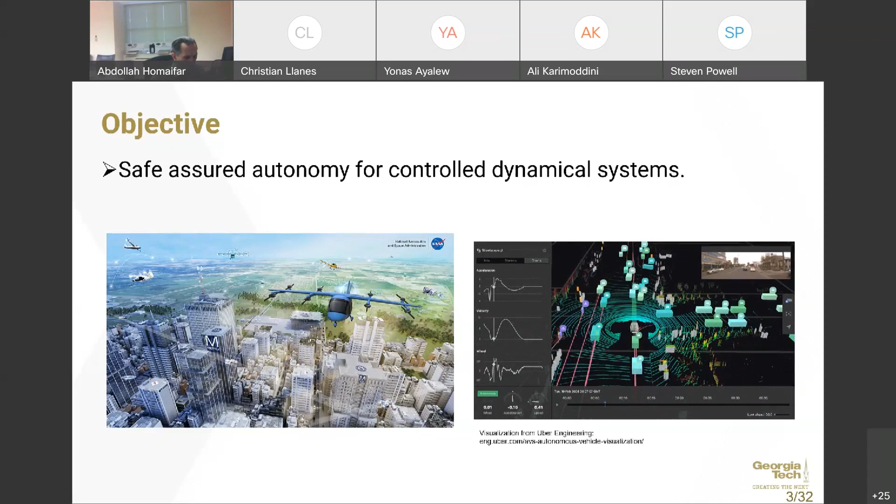In this slide, I'll give a brief review of the structure of a controlled dynamical system. We're only really looking at continuous systems with defined control inputs in this talk, where the state evolution is continuous in time, as opposed to discrete or hybrid systems with possible switching mechanisms.

If we look above at the system dynamics, we see some equations - an ordinary differential equation with another mapping equation from x, which is the state. These can represent position and velocity terms for a vehicle, and y represents the outputs. These can be sensor measurements, and they can also be corrupted from some noise sometimes - this is introduced in the formulation.

The system dynamics produces some outputs, which are measured from some sensor. Then you have some estimator, whether it be a particle filter or a Kalman filter. With this estimation, if there's noise introduced into the sensor, then the estimated state is not exact, but in a perfect world, you can inherently map from the output y to x using the inverse of h.

So if it is noisy, then you get some x hat, which is the estimate of the state, and you feed that to a primary controller. This is what's going to be controlling your vehicle to do some kind of objective. This primary controller can use model predictive control, PID, linear quadratic regulation, or a neural network.

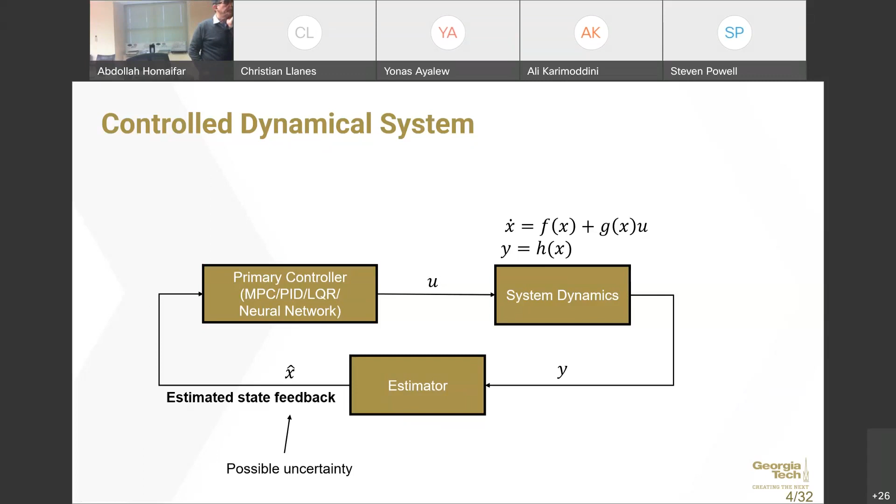This will give some desired control action that meets the objective, and that is fed to your system dynamics, which is the vehicle - braking on a car, or gas on a car, or thrust on a quadrotor, et cetera, et cetera.

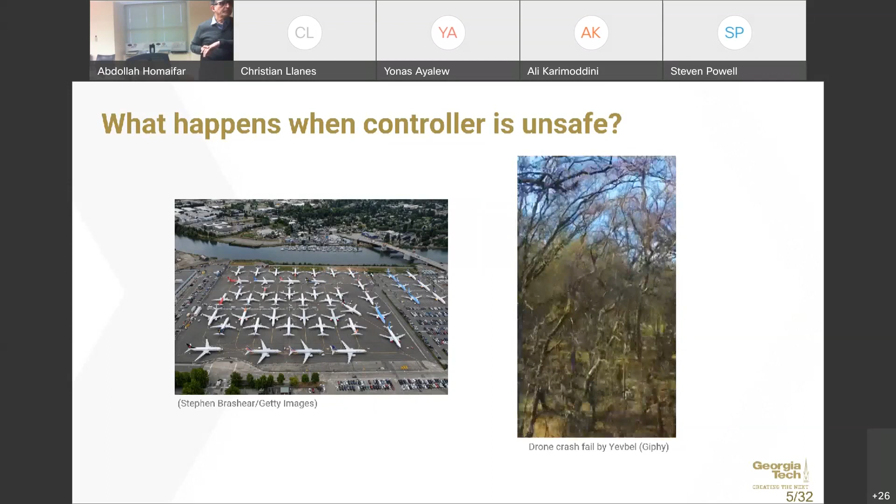So what happens when the controller is unsafe? On a large scale, your fleet of aircraft might be grounded because of numerous accidents that may have occurred. On a smaller scale, your UAV crashes into a tree. If we want to operate in an urban environment, we really need to make sure this does not occur. There are a lot of buildings, traffic, and a vehicle falling down and hitting somebody would be a total loss, and we would not want that in an urban environment. So one possible solution to this problem is a runtime assurance mechanism.

As in the previous slide on controlled dynamical systems, we now place an assurance mechanism, or a supervisor, over the primary controller to ensure the system does not crash. One method of designing the assurance mechanism is to switch to a backup controller when you're unsafe. The problem is if you switch too late, you might be unsafe anyway. So you need to formalize a decision module to make sure you're switching to a backup controller at the right time, very specifically. That can be non-intuitive to design, and there could still be faults. You can still have some chattering in the switching between the backup controller and the primary controller.

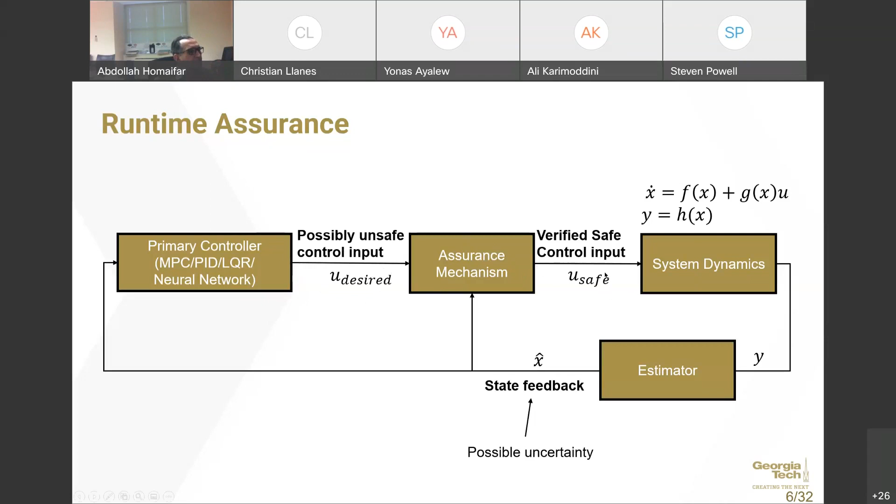So in our approach, what we're going to be using is control barrier functions. This allows us to minimally adjust the desired controller to give a safe controller that is as close to desired as possible, but is safe. That's what we're going to be doing, using control barrier functions.

Control barrier functions are a mathematical formulation for specifying safety boundaries. If you're approaching some unsafe condition, a good way to express safety is to continuously slow down, and the rate you slow down is dependent on how close you are to unsafe. This is like braking in a car. Humans intuitively understand that if you're approaching a stopped vehicle at a red light, you press on the brakes, but the force you put on the brake pedal depends on how fast you are and how close you are to the stopped vehicle.

This is really analogous to control barrier functions. A barrier function is a function where, for some given safe region, the boundary equals 0, and everything that is safe is positive. In this example, we have the function h of x equals 4 minus x1 squared minus x2 squared. You can consider x1 and x2 to be position states, position in x and y of the vehicle.

Safety is defined by plotting this function, where the vertical axis is h of x, our barrier function. All positive terms fall within the region enclosed by this circle, meaning you're safe if you're within the circle, and everything outside of it is unsafe. The boundary that splits the safe and unsafe regions is when h of x, the barrier function, equals 0. Safety is when you're in the positive region.

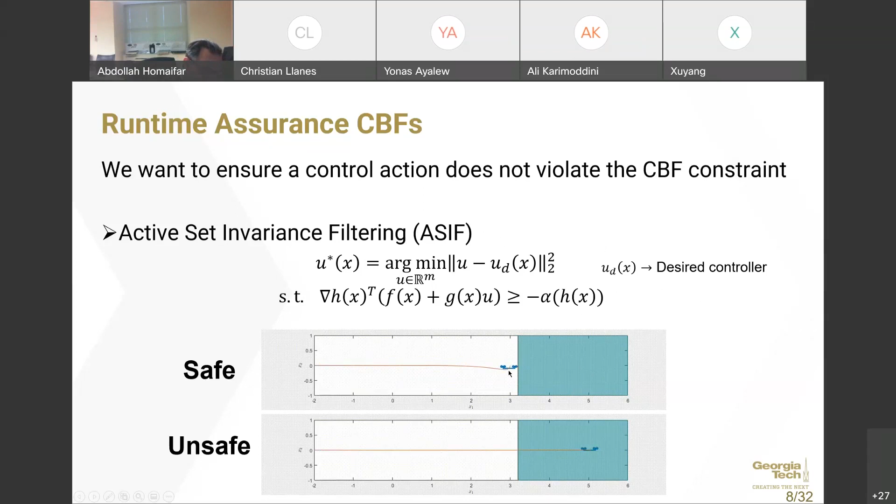Now if we apply this to a quadrotor example - a basic two-dimensional case where the objective is to go from -2 to 5, with a wall between 3 and 4 - the vehicle will crash when it hits the wall in the real world. Without this active set invariance filtering algorithm, the vehicle crashes. But using this supervisory control methodology, the vehicle slows down and stops before hitting the wall. Even at point 3, the primary controller is still telling it to go to 5, but the supervisor says no, there's a wall, so I can't keep going.

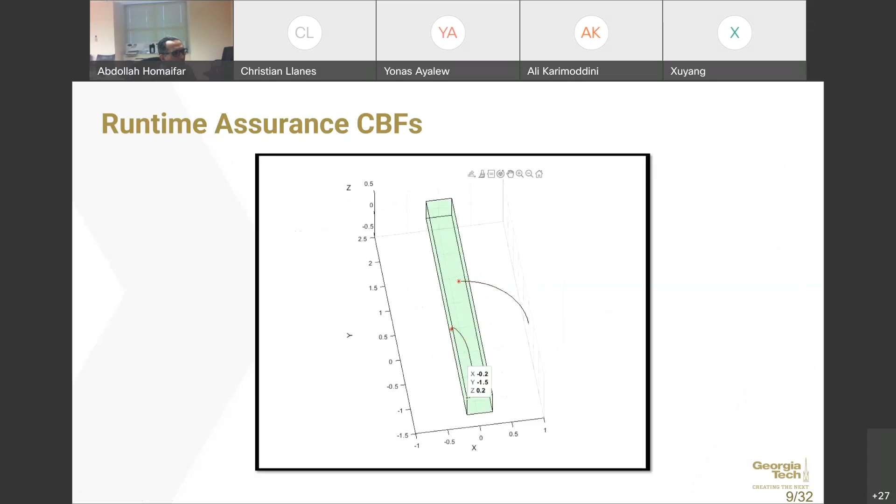Another example: a quadrotor in a corridor, shown as this green rectangle, allowed to traverse only within it. The objective is to go from point 0,-1 to the other side at 0,2. The ideal path would be a straight line, but an obstacle comes into the path, and one safety constraint is that the vehicle isn't allowed within a certain distance of the obstacle. If I play the simulation, you'll see the vehicle turns back as the obstacle enters its path inside the corridor, and once it clears the path, it proceeds freely since it's now safe to continue.

Using control barrier functions this way can result in a few problems. The first issue is control constraints: if your vehicle or dynamical system has actuator constraints, such as upper and lower limits of a quadrotor's thrust, or the braking power of a car, control barrier functions may not provide a viable safety controller. For some problems, the control action requested by the CBF is out of the range of possibilities because you're saturated - you can't produce more thrust than you have in the real world. So many real-world systems have actuator constraints, and using control barrier functions may not guarantee safety. Another problem here is the relative degree.

So the relative degree of a dynamical system, at a high level, this is like having a quad rotor that has some horizontal velocity directly towards, say, a wall. If you define the barrier function as the distance to the wall, then your control barrier function would not provide a safety controller. This comes from the fact that you cannot slow down without first pitching the quad rotor to the left. At that instant in time, no possible controller can instantaneously change the time derivative of the barrier function, because you first have to pitch to the left to be able to clear or slow down.

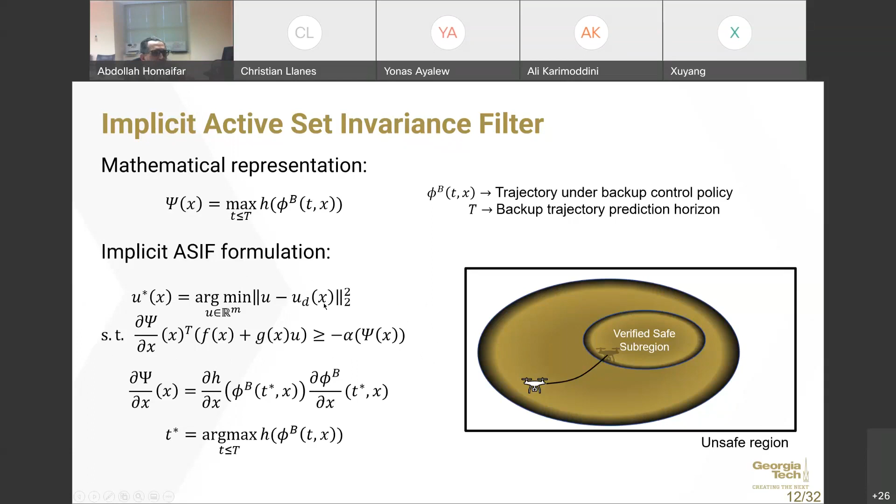So now we can cover this section of safety from in-the-loop reachability. This is a continuation of the previous slides on control barrier functions and implicit CBFs, but now we introduce reachability, which comes in from adding some disturbances to the dynamics.

If we add some bounded disturbance to this quadrotor simulation with the CBF I showed you before, you see that this vehicle is not safe anymore, because the disturbance is not taken into account, and eventually the vehicle crashes into the wall. If I were to use implicit CBF with some small verified subregion that, as I said before, is guaranteed to be safe even with disturbances, then that small subregion we'll call a robustly forward invariant subregion.

So we need to make sure that for all possible combinations of the disturbance, we're guaranteed to be within this safe subregion. The major problem is that computing the reachable set, the set of all possible states you may end up in for all possible combinations of the disturbance, is expensive.

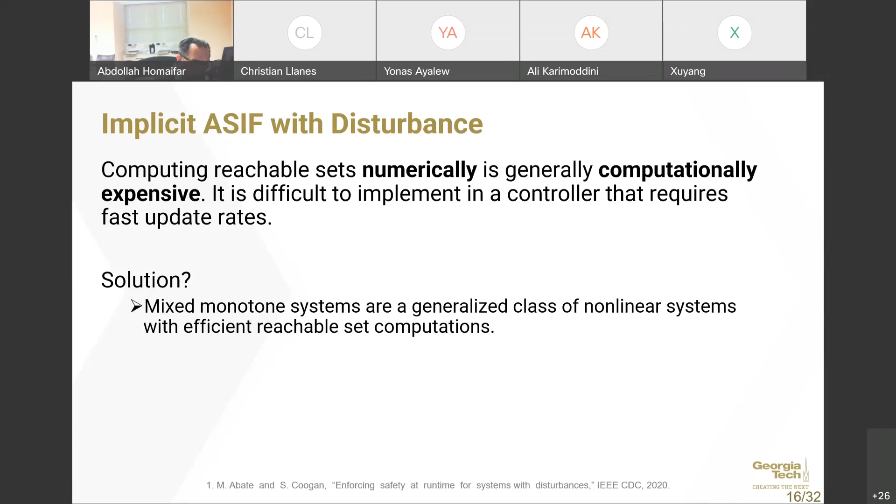In the following slides, I'll discuss a bit about mixed monotone systems. Here we consider this autonomous non-deterministic system: x dot equals F of x and w, where x is in this set of states X, and w represents the disturbances.

There may be multiple decomposition functions that satisfy this condition with varying levels of conservatism relative to the true reachable set. In the next slide, I'll show how this decomposition function is used to find an over-approximation of the reachable set.

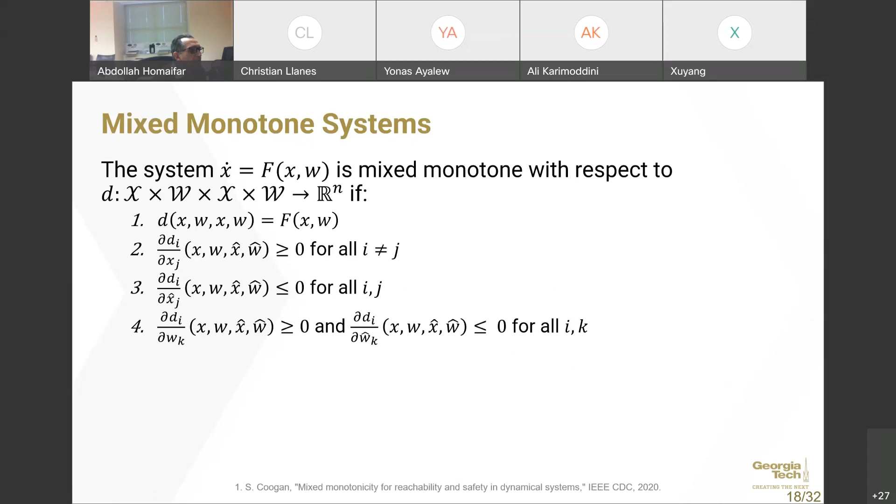First, we construct a 2 times n dimensional embedding system from the decomposition function. For example, in 2 dimensions, n equals 2. The first 2 entries can be thought of as the lower left corner of a rectangle, and the last 2 entries are the top right corner of this rectangle. This generalizes to multiple dimensions, forming a hyperrectangle in the embedding system.

The embedding system is actually monotone with respect to something called a southeast order in the embedding space. The southeast order means: given a tuple of x, x hat, y, and y hat, if x is less than or equal to y, and y hat is less than or equal to x hat, then this condition is valid.

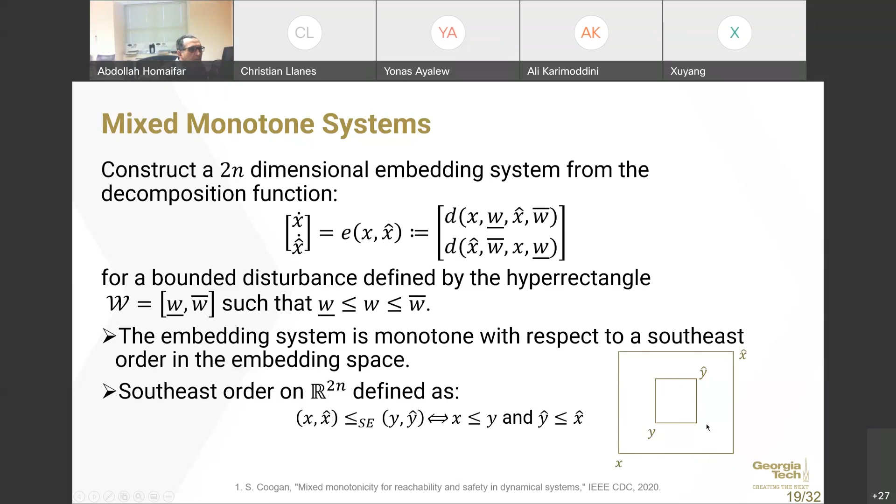This can be visualized in 2D, with x being the lower left corner, x hat the top right corner, y the lower left, and y hat the upper right. Now if x and x hat are less than or equal to y and y hat with respect to this southeast order, then the rectangle defined by y and y hat is fully contained within the rectangle of x and x hat.

One important detail we're assuming is that closed loop backup dynamics are mixed monotone with respect to a decomposition function. This enables us to use the backup controller as needed in the implicit ASIF formulation we discussed previously. At each point in time, say you're running at 100 hertz or 250 hertz, you simulate the embedding system for a fixed prediction horizon.

This provides an over approximation of the reachable set. What mixed monotonicity does is convert a reachability problem, which can take seconds or minutes or even longer, into something you're trying to do in a loop. Now you solve this continuously as an ordinary differential equation, which is way more computationally attractive than previously using brute force.

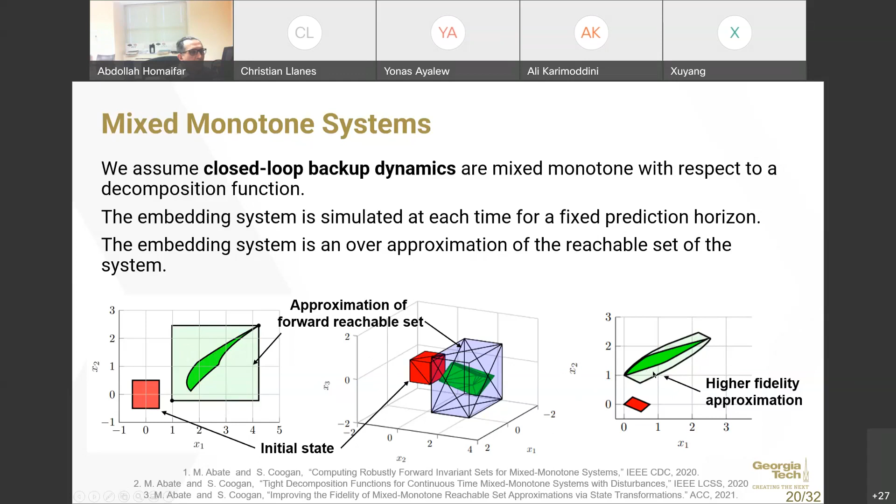Now for the algorithmic overview.

You find the minimum of the barrier function over this entire set, which you can do because of the nature of how the barrier function is defined as a hyperrectangle — you can evaluate each corner, which in 2 dimensions is 4 corners, but in multiple dimensions is 2 to the n. You evaluate all the corners, and the one that's minimized is the one you're evaluating to.

Now you do this for the entire trajectory. At each instant in time, you have some hyperrectangle, and you evaluate the corner repeatedly for the entire trajectory, then we do the maximizing step — not over the barrier function, just strictly h. It's over what evaluates to the worst corner on the rectangle.

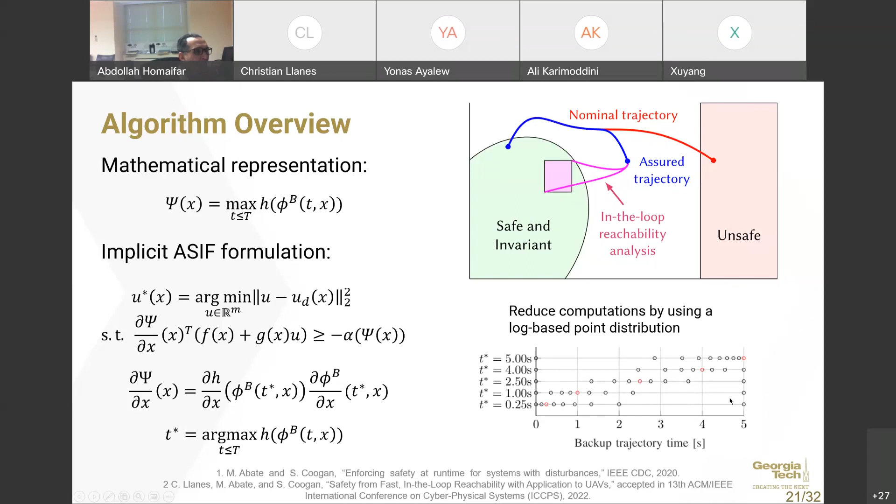So instead of using a uniform distribution to compute the minimum barrier function over the entire hyperrectangle across the trajectory, you can use a log-based distribution. You cluster more resolution close to where T star was before, getting a better approximation and better resolution and performance. Otherwise you'd have to evaluate many more unnecessary points, and this allows us to run at these higher rates.

That was pretty much the final algorithm overview. Now I'm going to discuss a hardware demonstration of our algorithm for a dual quadrotor case study.

Now we need to supervise this and ensure they stay within some safe displacement in delta Y and delta Z. The goal of the implicit ASIF filter is to filter those commands to avoid this collision, and we're defining a safe distance to be 1 meter in displacement in delta Y and delta Z.

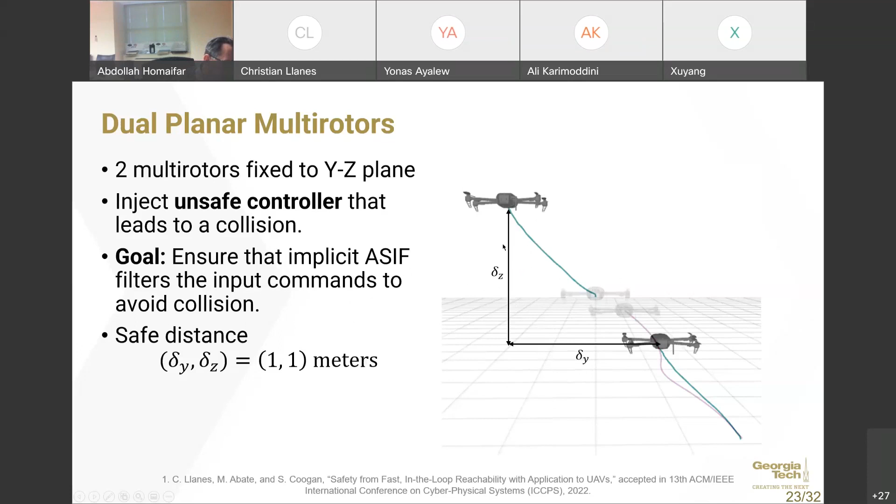So as I said before, we need a backup controller, as originally in the implicit ASIF formulation. The backup controller we're using essentially considers what happens if there's a spring in the Y and Z directions, and this spring is going to saturate. So we'll have a saturated spring, and then dampening terms in the Y and Z velocities of each quadrotor. That'll produce forces in each of the cardinal directions.

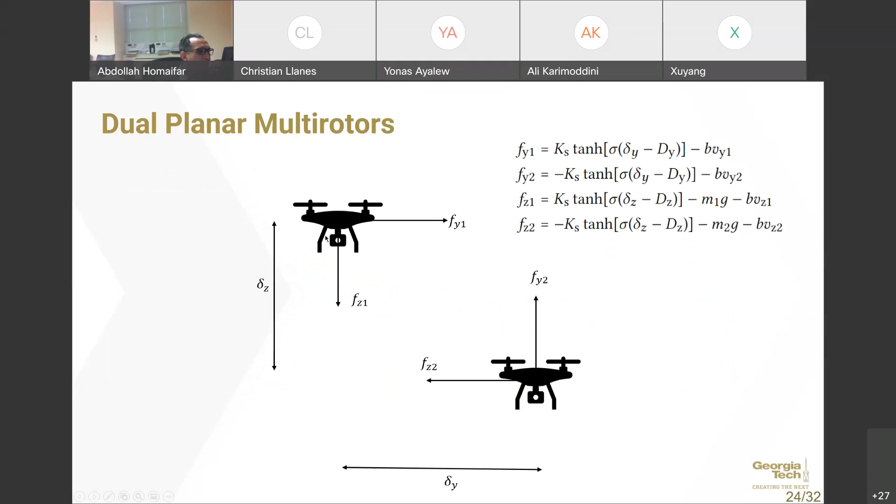And then you can also find a safe and invariant subregion, which we did with a Lyapunov-like equation.

For the hardware, we use a custom build with a Jetson TX2 connected to a Quasar TX2 carrier board, running Ubuntu TX2 Linux 2004. This also connects to a smaller computing power flight controller, which handles everything related to low-level control, like the electronic speed controllers, the motors, all the communication, sensors, and estimation. This flight controller is connected with the Quasar board, the Jetson TX2.

For software, we're using ROS2, running on the Jetson TX2, which runs our main algorithm, because it requires so much computation that a microcontroller cannot handle. But it's fast enough, and there's very little latency between the carrier board, the onboard computer, and the flight controller.

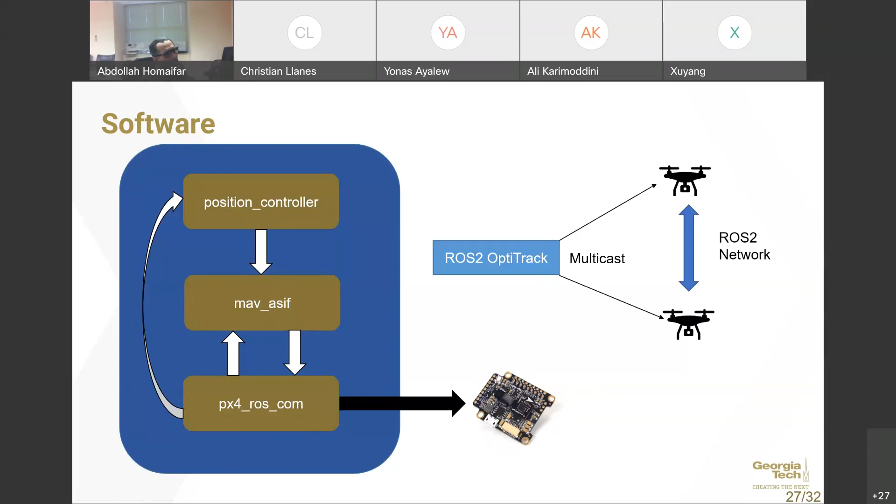Here's a simulation on Gazebo. Both vehicles are given an unsafe control action. In red is without our algorithm, and in black is with our algorithm. In red, the bottom right vehicle collides with the top left vehicle. But with our algorithm, they both almost reach the centroid, the objective point, while staying a safe distance apart, within the provided safety boundary.

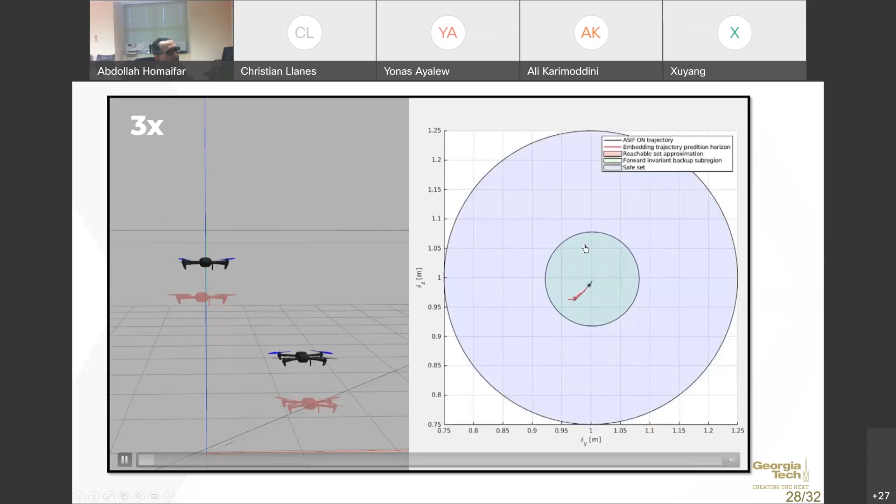So here is the data for this flight, and two things I want to point out: on the left-hand side are the control actions.

In red is going to be the primary controller - that is the unsafe control action that I'm providing. In blue is going to be the filtered control actions after passing through our algorithm.

Previously, before the unsafe controller is activated, you can see our algorithm is active, but it's already safe, so it acts as a pass-through.

It's allowing it to go through because it's already safe. But then the unsafe controller comes in, and it's initially allowed to explore a little bit until it starts to get too close together. So now it's starting to get filtered, and you see a disparity between the two controllers, because it requires some activation to ensure safety.

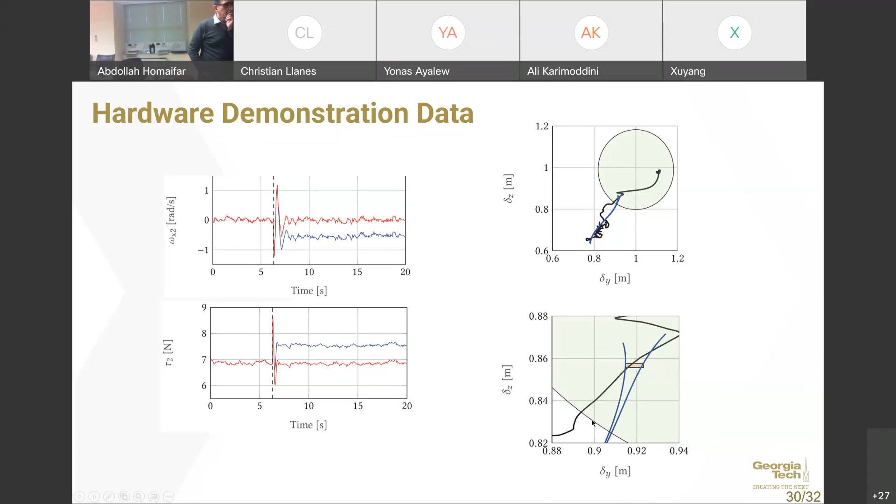In blue is the reachable set's lower left and top right corners, and in orange you see the reachable set. This reachable set is fully contained in the green, so it's allowed to keep traversing. But as it gets closer and closer to the boundary, it has to keep slowing down.

So now here's our algorithm execution time. The execution time for our algorithm has the highest frequency of occurrence in the 2.5 to 3 millisecond range, as you can see in this histogram plotting execution time versus frequency of occurrence.

So the main things are that we're computing reachable sets from this simulation of the embedding system - we're solving this ODE. Then we're computing the barrier function over 2 to the n corners of the hyperrectangle, solving 2 to the n linear equations, and then solving this optimization problem that I discussed.

We can do that up to 250 hertz. We only really do it at 100 hertz because that's all we need, but we can still do it at 250 hertz. So a primary controller that runs at 250 hertz, we could filter it out. That is the main strength of our algorithm, and we can do all this on a small onboard computer.

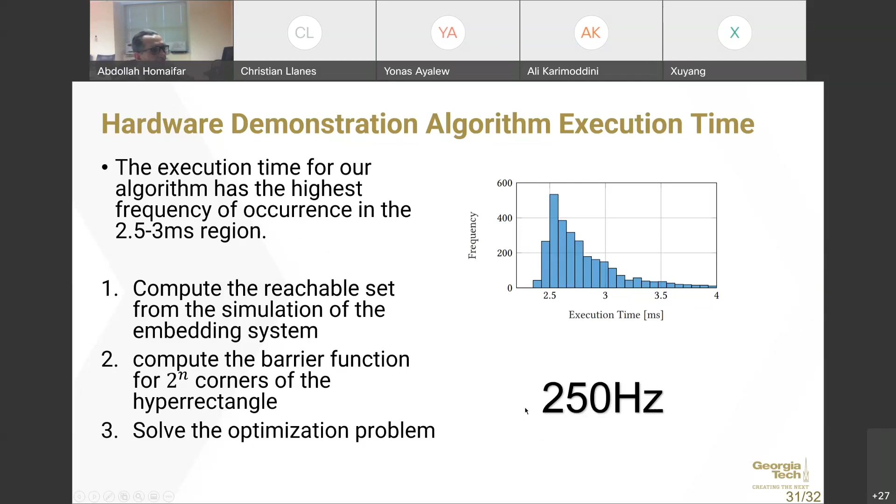So some concluding remarks. Control barrier functions can be coupled with a simulation of the backup controller to increase usability. For a system with disturbances, the prediction is a reachable set, and we can use mixed monotone systems for efficient reachability computations. This implementation is on embedded hardware, and we're able to combine these techniques to achieve really fast, in-the-loop reachability analysis with formal safety guarantees for this dynamical system with disturbances.

So that is the end of my talk.

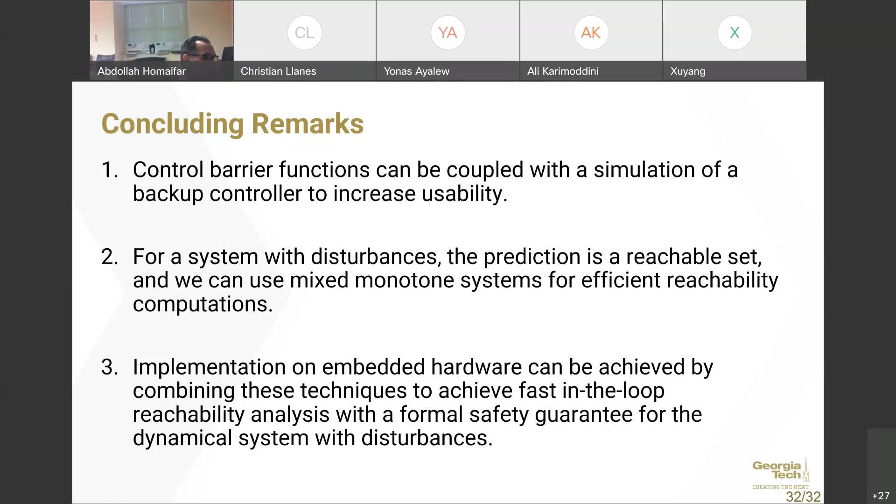Thank you very much, Christian. Okay, very informative talk. Thank you. Okay, any question for Christian?

Okay, while others are thinking in the cyberspace, what are the major characteristics of this barrier function that you mentioned? Are you assuming that barrier functions are smooth?

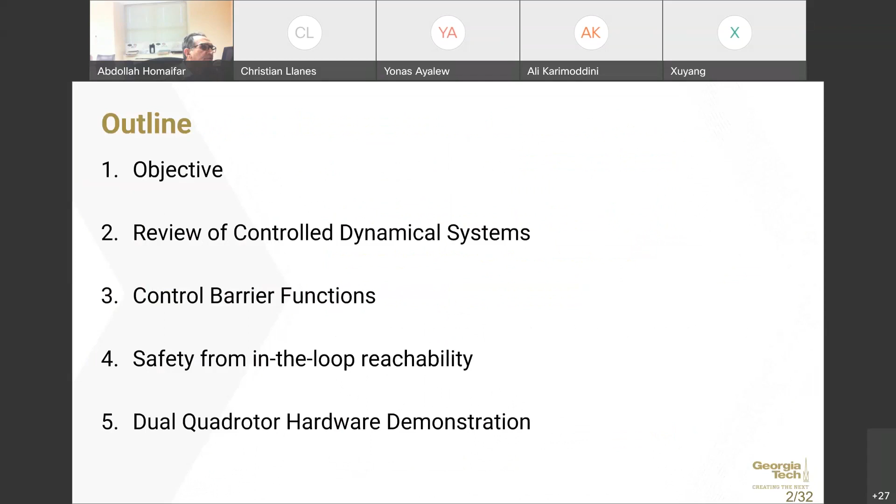Yeah, it's an actual function in itself, it's not some discrete thing. No, are you assuming smoothness? Yes. So convex, basically - are you assuming these barrier functions are convex?

Right, well actually, not convex. No, it's actually concave in this example here. It's not, but the convexity doesn't have anything to do with solving the optimization problem itself - the optimization problem is convex.

The smoothness means you don't have any switching, as in the simplex architecture where you have switching to a backup controller at some particular time - you have some jump in the controller. This doesn't occur in this problem because we're solving this optimization problem, and as it gets closer and closer to the unsafe boundary region, you slowly start to alter the control action that is desired.

Basically, what you're saying is you have two control actions - when it comes to switching, you know how to switch it. Basically both control actions are on, and you don't need any switching. Yeah, there is no switching - it doesn't switch from one controller to the other.

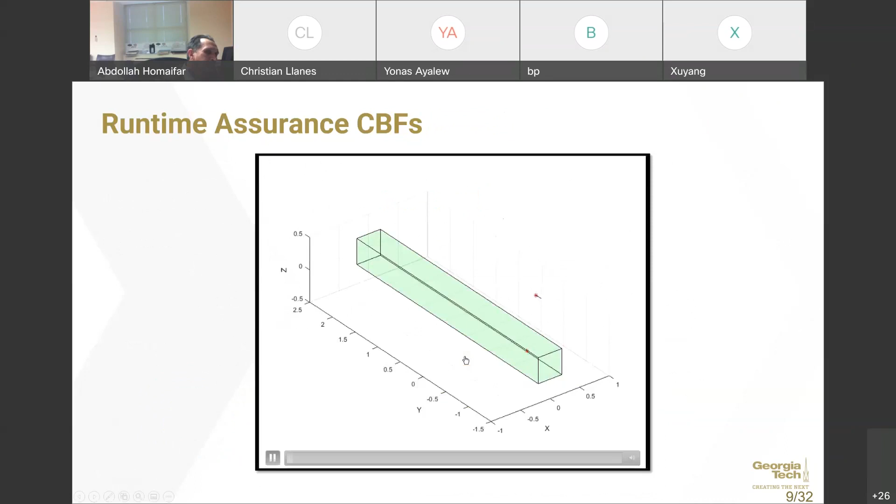In this simple classic CBF example, you can find a barrier function however you like. You can also run into these relative degree problems, depending on how you choose the barrier function. But there's a lot more to this theory you also need to consider.

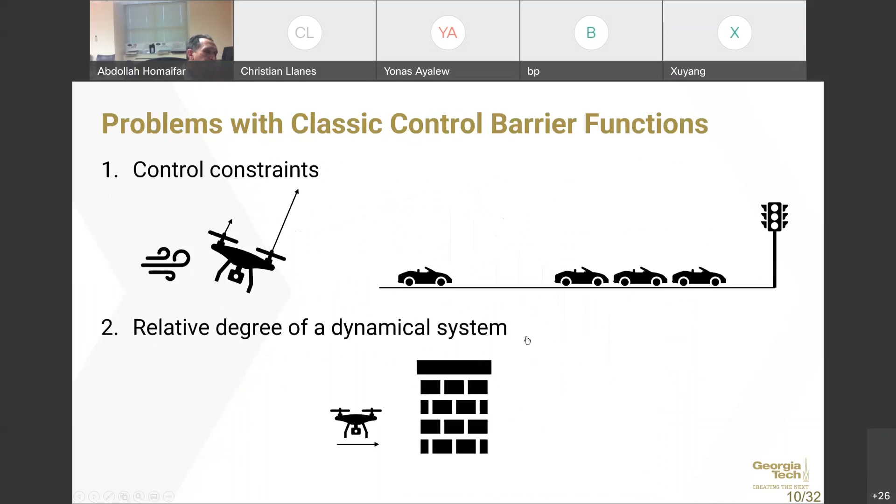Okay. Thank you. Thank you very much. Okay, any question from Christian on the cyberspace?

I have a question, sorry, Mehran is speaking. Is it possible to make the safety region time varying or changing frequently? So you need to verify that the safe region is actually safe a priori.

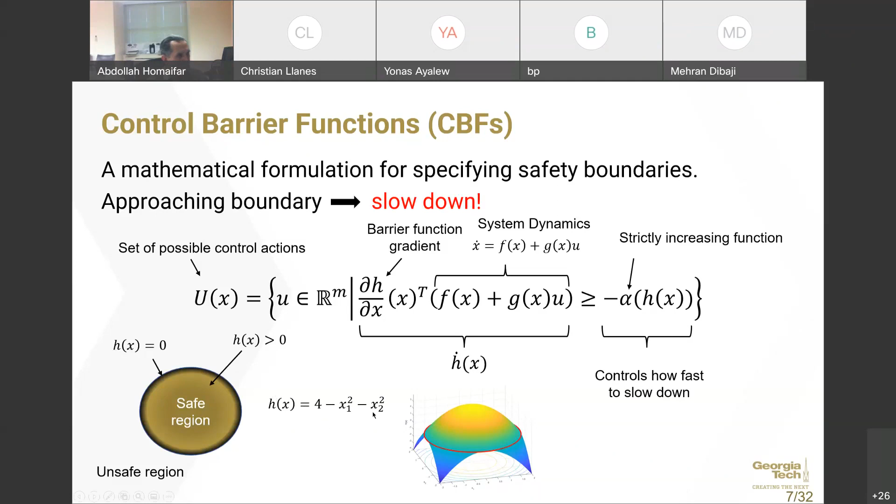Let's say I have a backup controller, in this little example of implicit ASIF. You have some smaller verified safe region, and you have a backup controller. So in our case, we use this backup controller.

These nonlinear springs, if you plug these into these equations, you get closed loop dynamics. Dynamics are with respect to states, there's no more inputs anymore. So you have closed loop dynamics. You find a valid Lyapunov function that is valid for the nonlinear system, so you have to find a set that is forward invariant, that is a valid Lyapunov function, and then you construct a barrier function out of that Lyapunov function. So you had to do all that stuff before to find that forward invariant set.

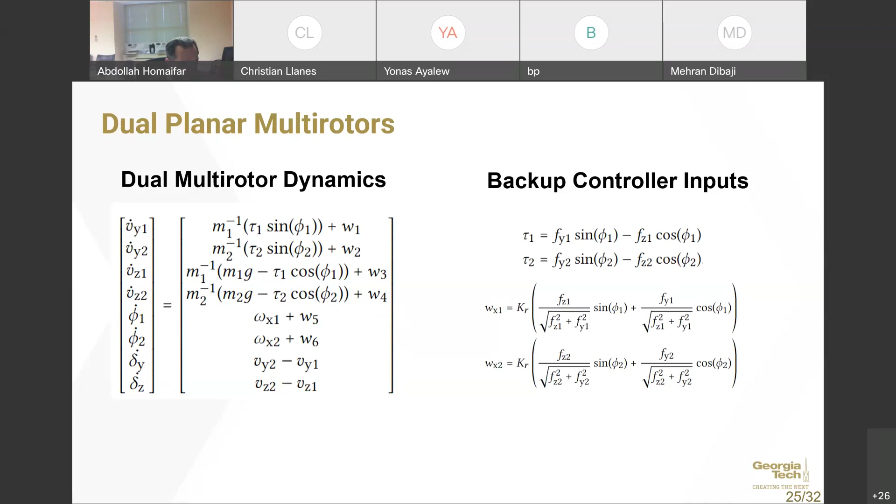Okay, so it's very much limited to. Okay, I understood. So the safety, you would know a priori what the safety is, right? So there's really no need to change the safety problem anymore. It's almost like saying, 'Oh, now my safety problem is to do this instead.' You cannot do that. Okay, so it's a common approach to use Lyapunov for these kind of problems. Thank you, yes, to construct that safe subregion.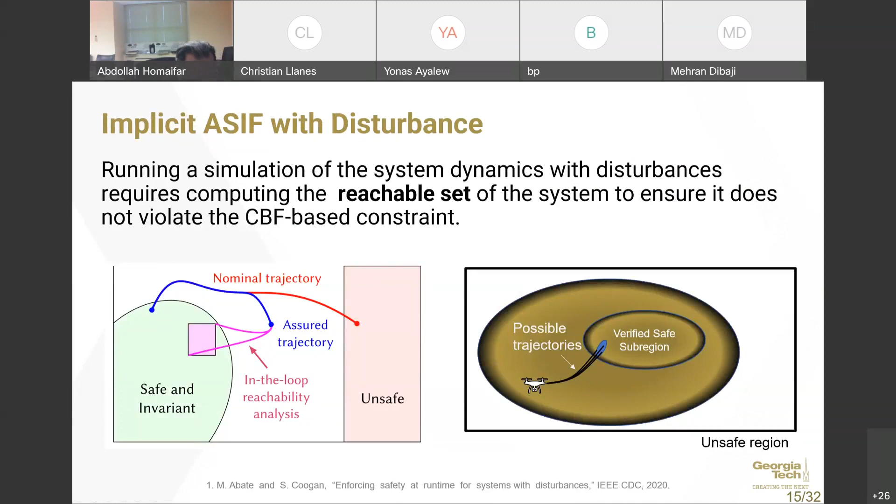Okay, you mentioned that, but what about the computation? Can you put a small computer in the drone that you mentioned, and do all the computation there?

Okay, thank you. Okay, any other question from Christian? Okay, if not, we're going to thank Christian. It really was a very good presentation.

Thank you. And I hope other students also take this as a guide of how detailed.